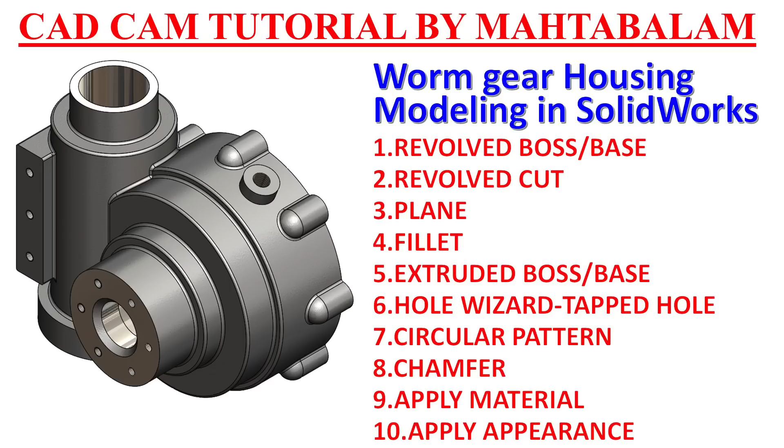In this tutorial, we are going to create a worm gear housing. Now look, all dimensions are in millimeters. Corner fillets are 2 mm unless otherwise specified. Material is also written at the bottom: cast steel. Density 7300 kg per cubic meter.

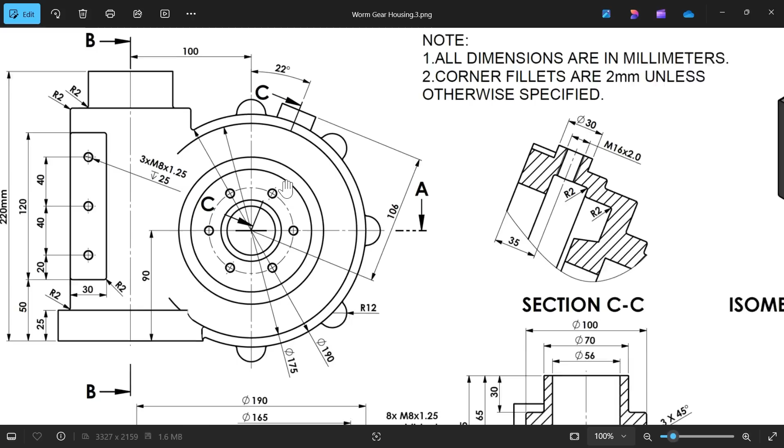Okay. Now, here we have one front view. This is considered the front view. Then there is a section AA. Section A passes through the center. This is section AA, and section BB for this cylinder body. This is going to be section BB, and there is section CC.

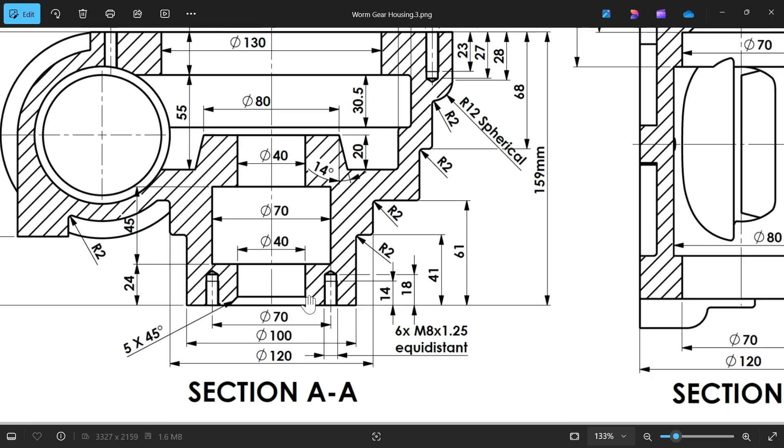We will see. So we are going to start with this outer body. You will see this circular body. First we will create the outer body, then we will cut. So for this outer body, just check section AA. Okay, let's make this body. Let's take the outer to outer dimension. Here you will see 100 millimeter and depth 41.

Similarly, the second one 120 diameter, depth 61. The third one and fourth one you will find here. Outer 190, 175, and depth 68, and total 159. Okay, that's it. Let's make this one first.

Now I'm going to choose top plane, sketch. Now activate the line tool. Okay, I want to tell one more thing. For reference, I am going to keep this cylindrical body center point at 60 millimeters. Remember how we are going to do this? Something like this.

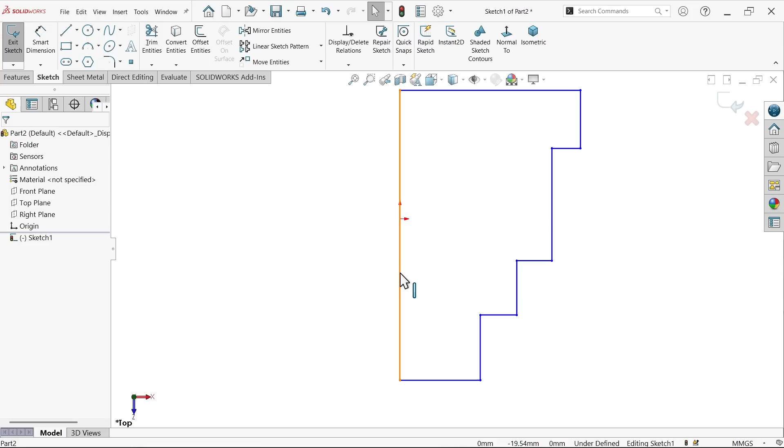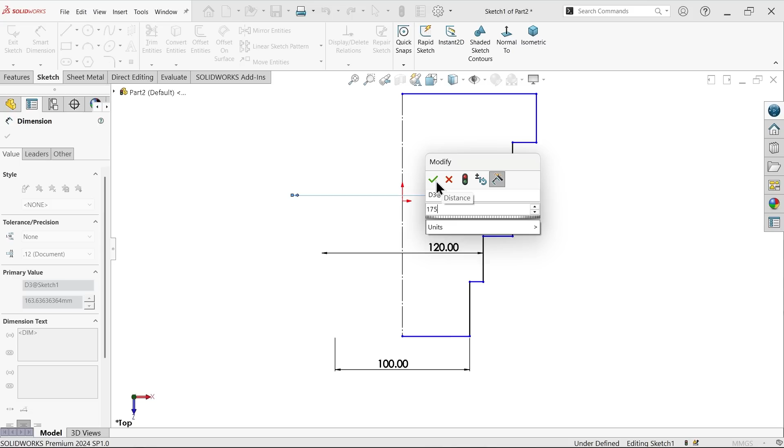Okay, select this line, construction, smart dimension. Now select this line and select the center point and move the cursor outside. It will show you the diameter. 100 millimeter. The second one 120. Third one 175. And the last one, outer body, 190. Okay.

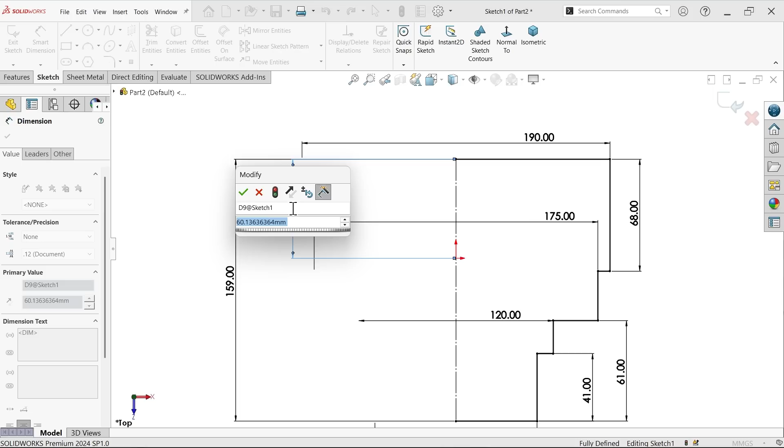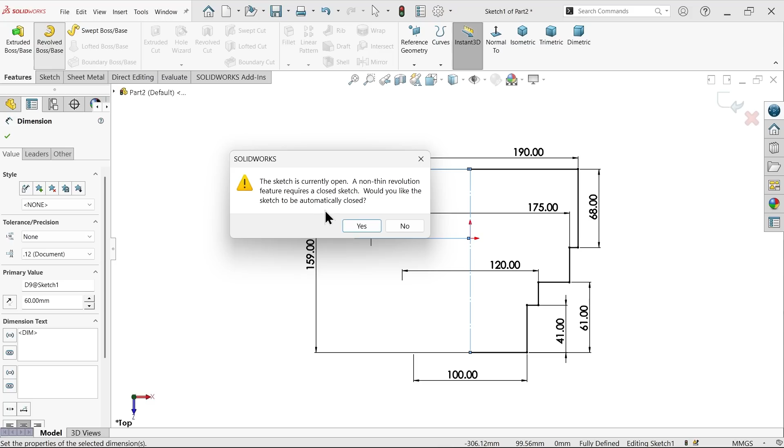Simply go to Features and activate the Revolved Boss/Base feature. Due to this construction line, the system says this profile is open. Would you like the sketch to be automatically closed? Say yes. Now, by default, the system took this center line as the axis of revolution. Now the body is going to revolve around this line. Here angle 360 degrees, end condition blind.

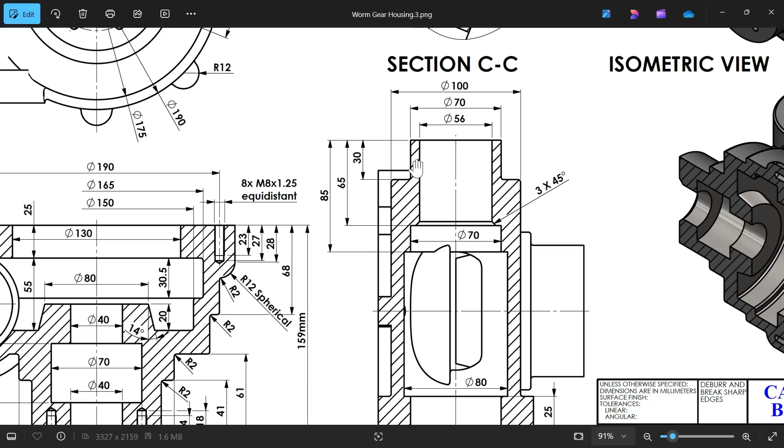Now let's make this cylindrical body. You will see this cylindrical body. What is the diameter for this? Section BB. This is section BB. Now from center, see the diameter 120 outer. Okay. Then this diameter 100. And there is one step, 30 millimeter, 56. Not 56, 70 millimeter. Okay.

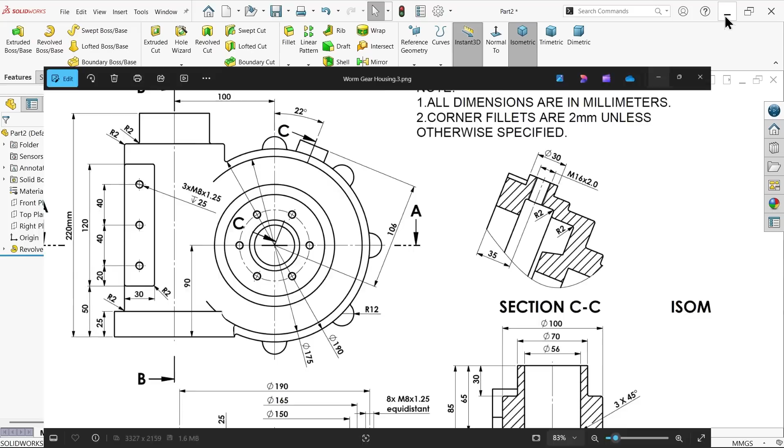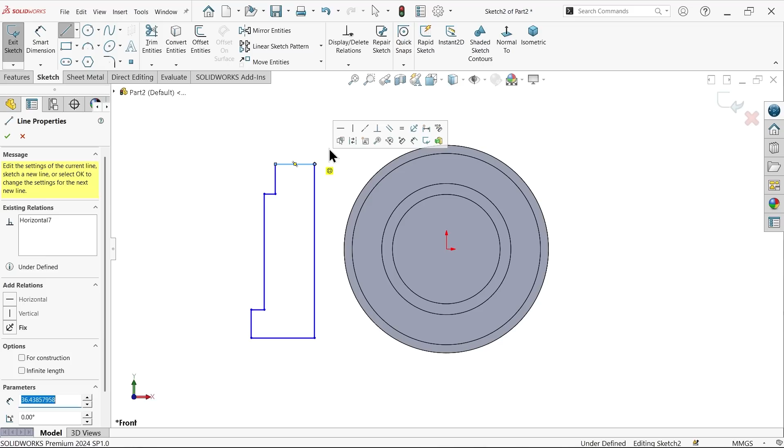Okay. Now select this line as a center line, smart dimension. Now first dimension, distance, 100 millimeter. Bottom distance, vertical length, 90 millimeter. Now this length, 25. And this is going to be 30. And the total length is 220.

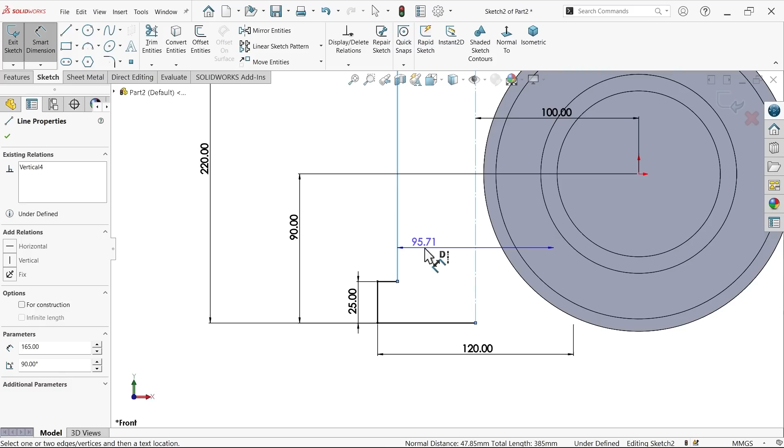Okay, now this diameter. Select the center point and move the cursor outside, it will show you the diameter. 120. 100. And the last one is 70. See, it's a fully defined sketch. Simply go to Features and activate the Revolved Boss/Base feature. Due to this construction line, the profile is open. So the system asks, would you like to close?

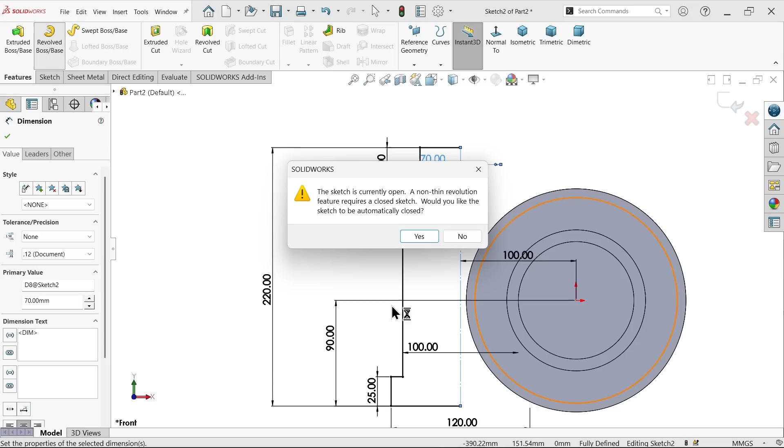Say yes. By default, the system took this center line as the axis of revolution. See here. And I want to make a complete circular body. So by default, the system took 360 degrees. If you make 180, it's going to make half. But we need the complete 360, and make sure Merge result is checked. So this is going to be one body. Here we go. Now it's time to cut.

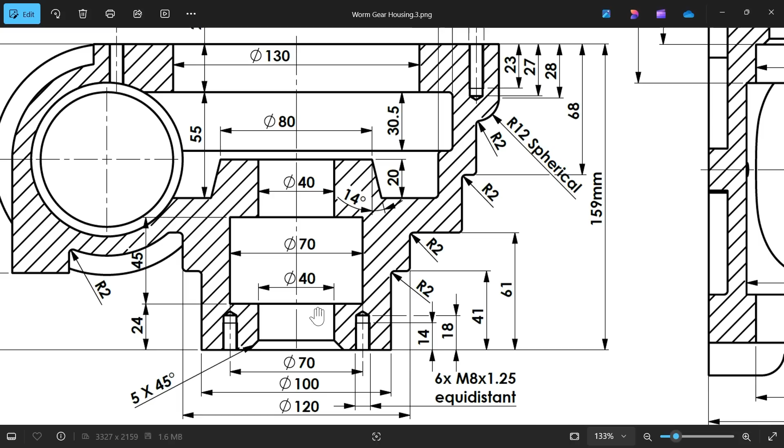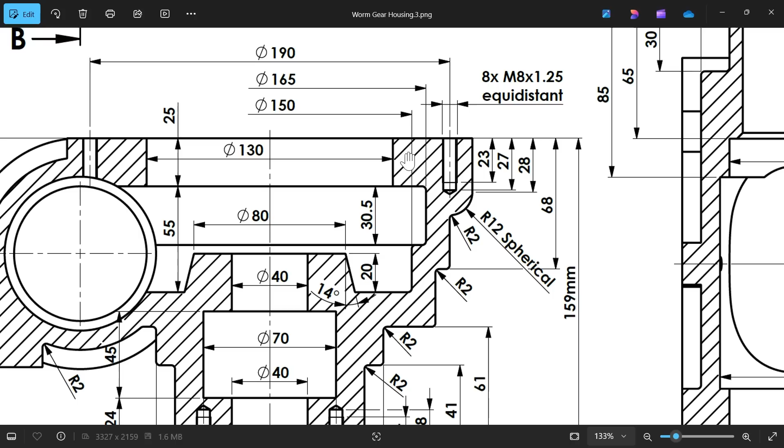You will see in the section view there are cutouts. Now for the cutout you have to go down from the bottom, front plane. Let's say 40 this diameter, 70 height, 24, 45 this height, then again 40. Okay, then here comes the inner diameter, this one 130, this one 165, and the other one 150. Fine.

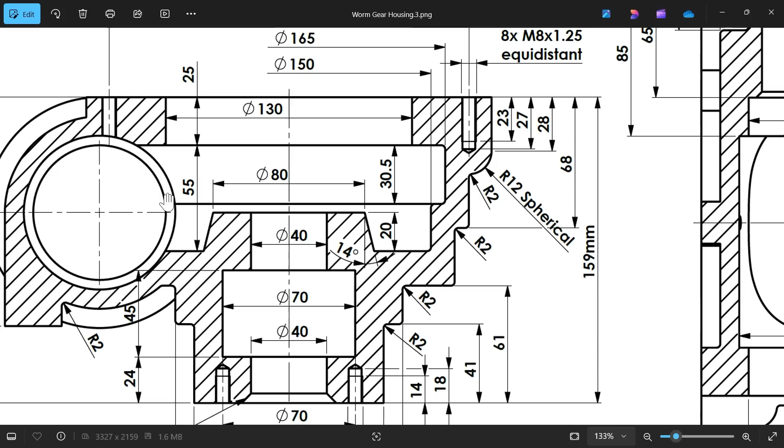Depth 20, 55, and here we have critical things, 20, 14 degrees. Okay, we will see how we can manage this one. 68, no, not this, for this one, 55, 25, 30.5 here, one given. Angle, remember, 20 from here to here. Okay, let's do it.

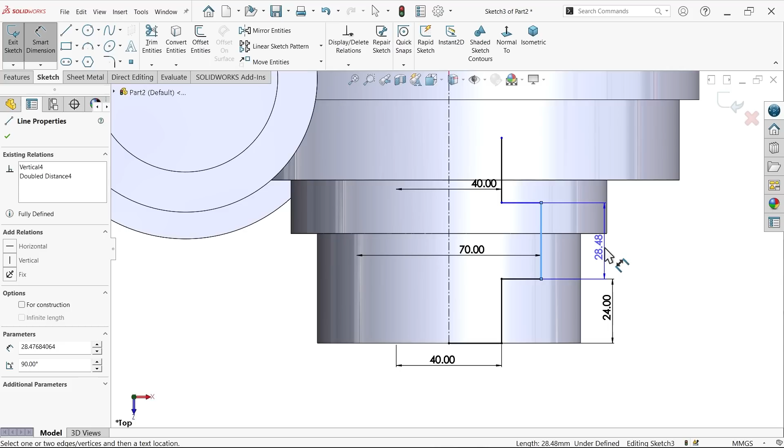Now for the plane, I am going to choose top plane. Sketch, draw one center line. Center line from midpoint to midpoint. Line, okay. Exit. Okay, let's define this first. 40, 70, again 40, and depth 24, 45. Okay, let's leave this one.

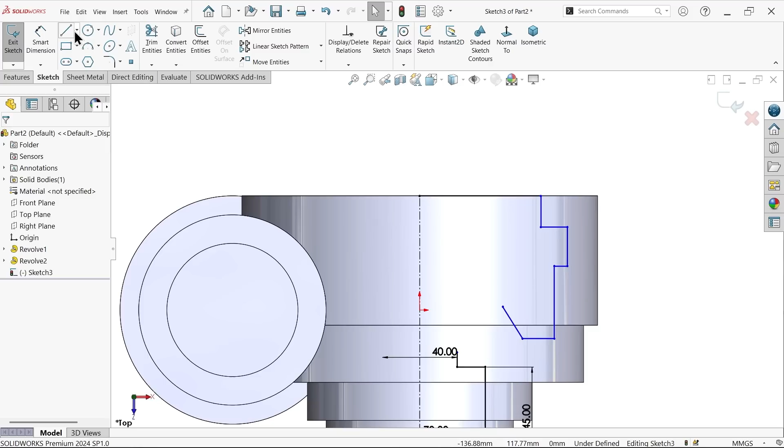Again activate line. Start from here, create a closed profile. Now come down, and we need to create something like this. Smart dimension. Now first this diameter, 130. The outer one, this is going to be 165, and there is the inner one. This is going to be 150 millimeter. Okay. Now this is also 80 millimeter. Okay.

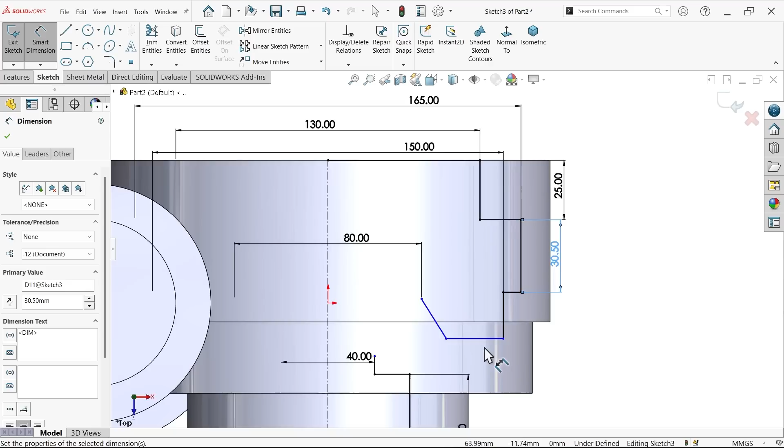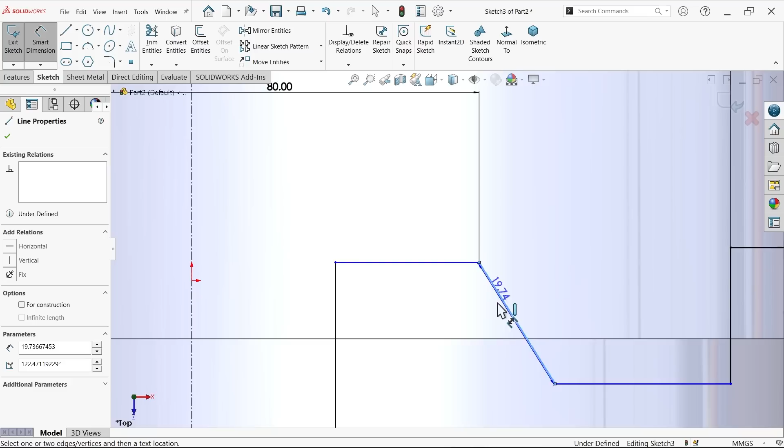Again, let's define 25 millimeter, 30.5 millimeter. Okay, let's move this one, and we need to connect with this. So select line, select this line, horizontal, smart dimension. Now first we need to define the angle. Select the line, select this vertex, and it will show you this. So select the bottom one, 14. Okay, this is important. Now this distance from here to here, 55.

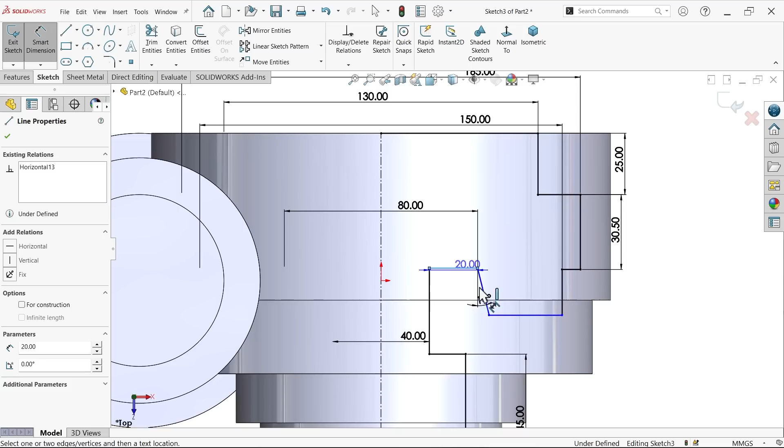Delete 55 given for this. Okay, let me correct. Distance between these two, 20. Okay, distance between these two, 55. Okay, now it's solved. Whatever we need to cut, now go to feature, activate revolve cut feature.

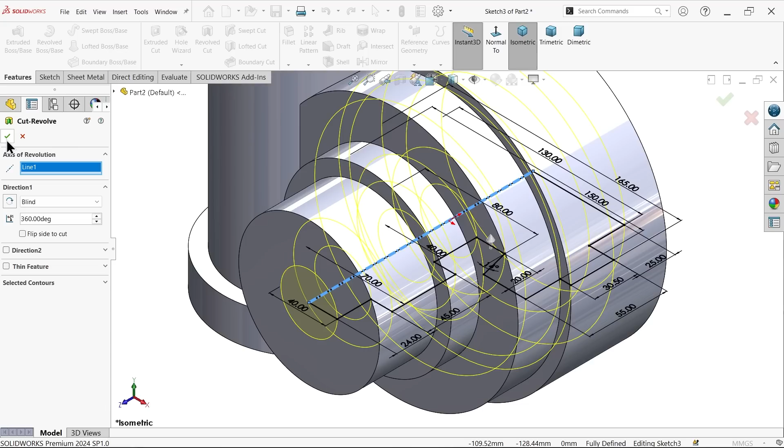Now look, by default the system took this center line as the axis of revolution. I want to cut a complete 360 degrees. So here by default 360, keep end condition blind, direction whatever you can keep, say okay. Section view, and you will see the preview. See? Okay. Now there is a chamfer, 5 into 45 degree. Okay.

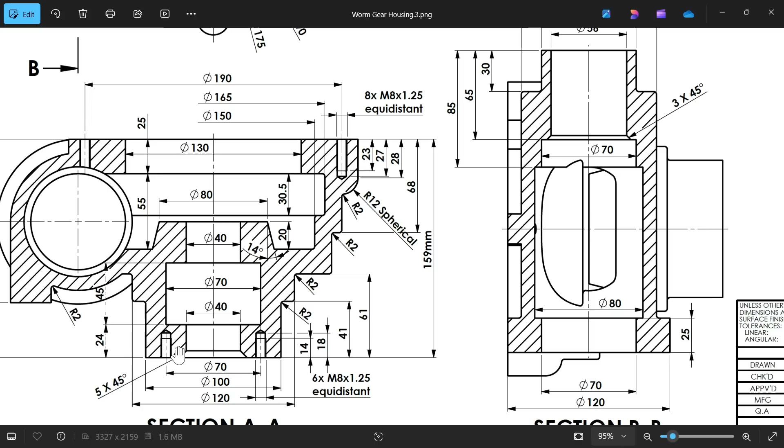Then we need to create one plane at 50 millimeter, and we need to make this circular body. Look, you will see here, this is going to attach diagonally from here to this body. See, 50 millimeter. You will observe here. Now activate plane. Select this one. Here make 50 millimeter reverse. Say okay. Now select the plane.

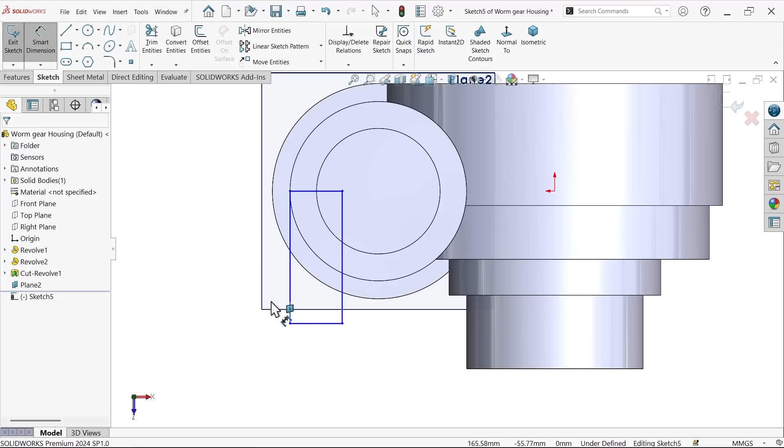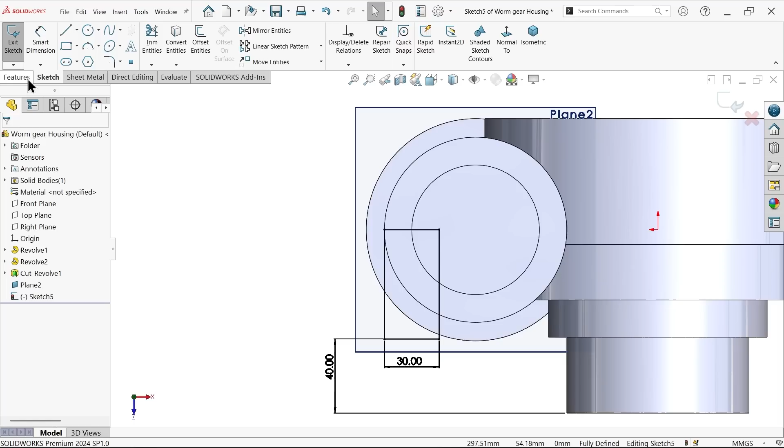Okay. Now corner rectangle, and see, this is going to start with this circle. Smart dimension. Now distance from here to bottom edge is shown 50 millimeter, 40 millimeter, and width 30 millimeter. It is still not fully defined. So okay, select this one, coincident. Okay. Extruded boss base, 120 millimeter reverse. Say okay.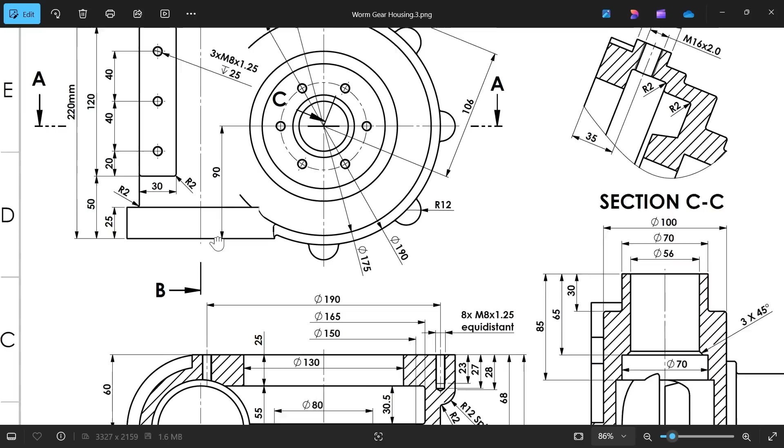Hide. You will observe the total length 120 millimeter and 50 millimeter from this face, and from here the distance 40 millimeter. Okay. Now you will see this circular body. There are total 8 number, 1, 2, 3, 4, 5, and 3 are invisible here. So we need to make this R12 and you will see the length of this is 28 millimeter.

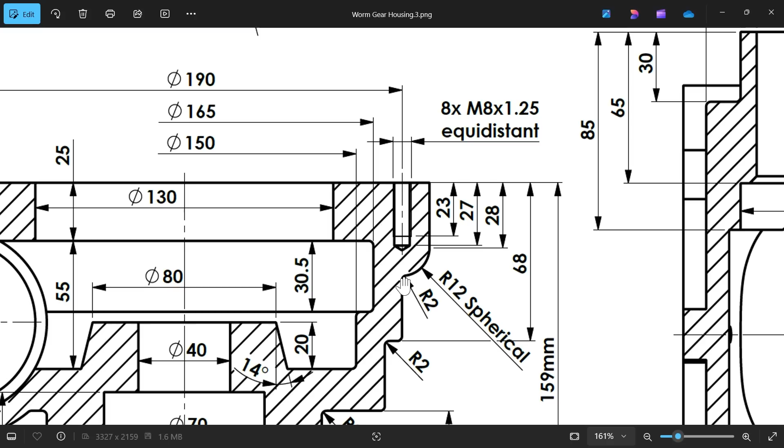Then there is a hole, tapped hole M8 1.25, 8 number equidistant, thread 23, depth of hole 27, and the diameter 190 pitch for this hole. Okay, and the corner radius you will see here 2 millimeter. Now there is one spherical R12.

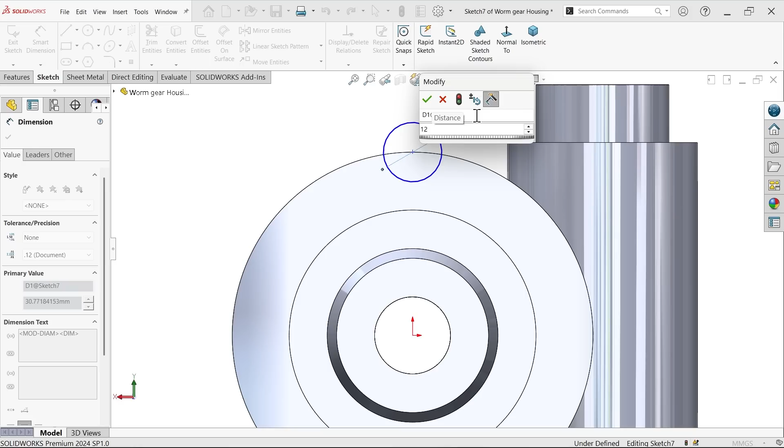Select this one, select this face, sketch, circle. Now let me draw a circle here. Smart dimension, 12 radius. Okay. Now distance from here to here, this is going to be 190 divided by 2 is 95. Okay. Define distance. Now keep end condition blind and length 28 millimeter but reverse direction. Say okay.

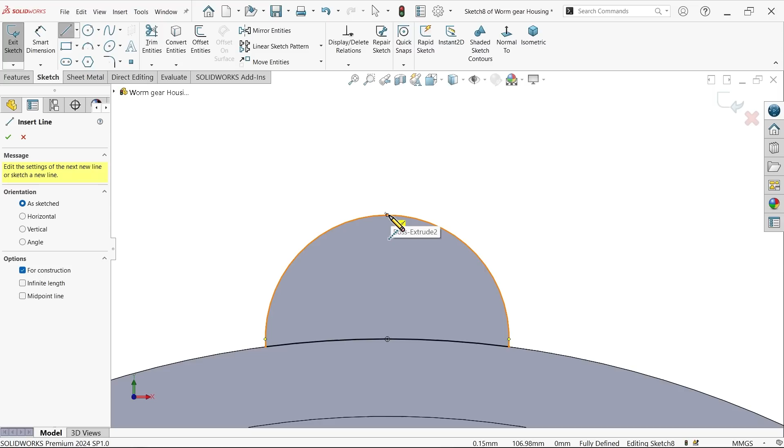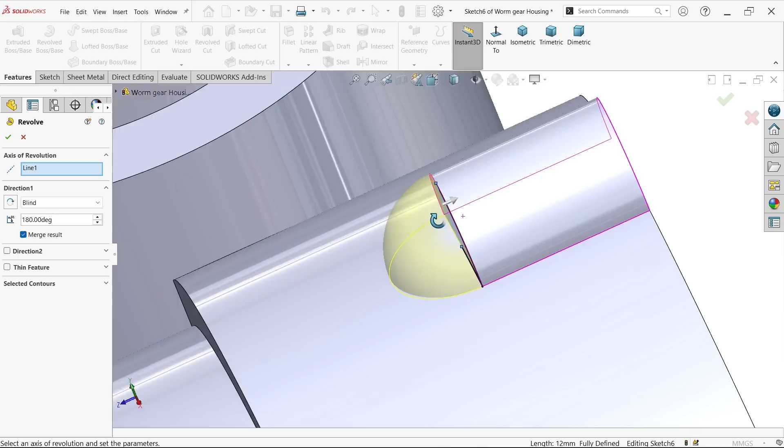Now here we need to create one spherical body, so I am going to select this face, sketch, convert entity, draw one line, trim entity, power trim, trim half portion. Okay. Revolve boss base. Yes. Now here I want only 180 degree, not 360 degree. Center line, by default the system took this center line. Say okay. And here we go.

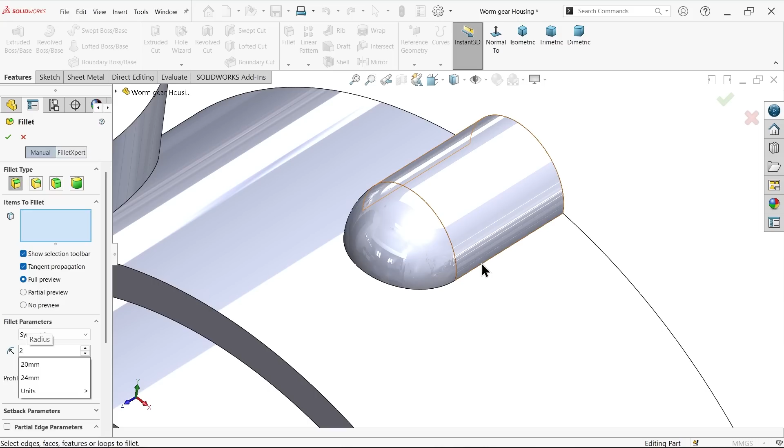Fillet. Here keep fillet type constant, symmetric, radius 2 millimeter, and select this one. Say okay. Now here we need to define hole wizard, tapped hole, ANSI metric bottoming tapped hole, not through all, M8. Now depth of hole 27 up to shoulder, thread 23 millimeter.

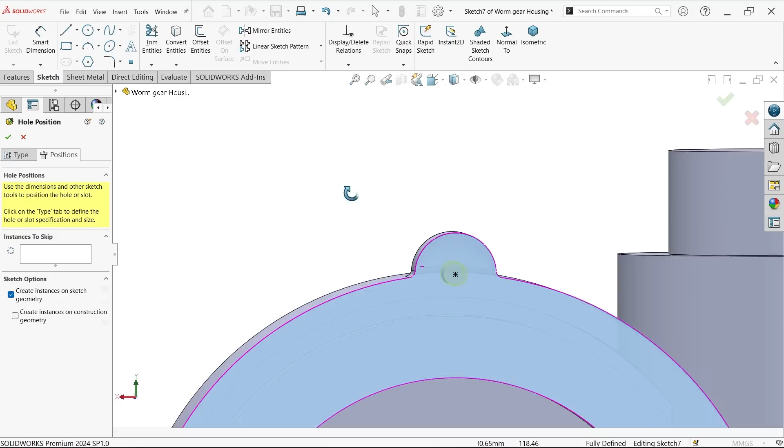Position. Now select this face. Now keep the cursor on the edge and it will show you the midpoint. See, there is a midpoint. Just place here. Look, it seems a fully defined sketch. Say okay. Go to options, document property, detailing, shaded cosmetic thread. Say okay and look.

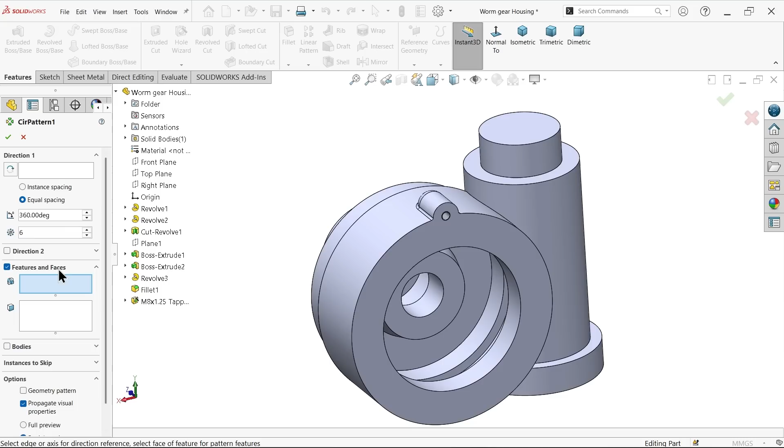Now we need to make 6 number of patterns. So circular pattern. Now feature. First you have to define one circular direction. Either select an axis or any circular edge. So I am going to select this face. This is circular at center. Equal spacing 360 degree and 6 number of instances. Feature. Now define features from here. This hole, fillet, revolve body and extrude body. These 4 we need. Say okay. And here we go.

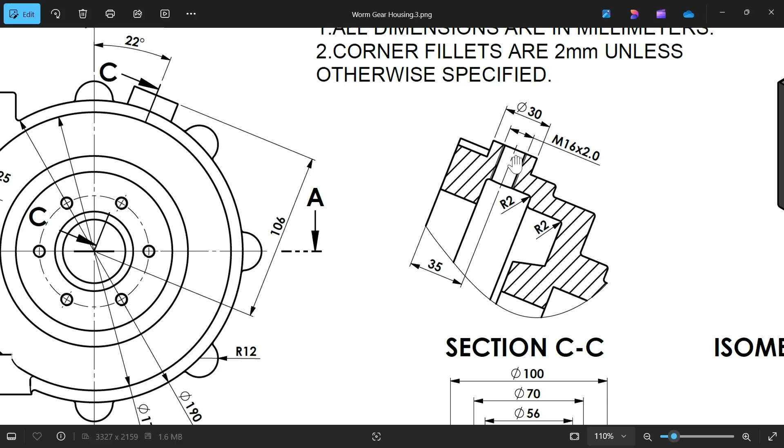Now let's make this one, 22 degree, 106 from center, and you will see this section view, 30 millimeter this diameter, and from one edge after this section view, see, from this outer edge 35 millimeter. Move towards body. Okay, then there is an M16 into 2 hole. Okay, this hole we need to make up to inside. That's fine.

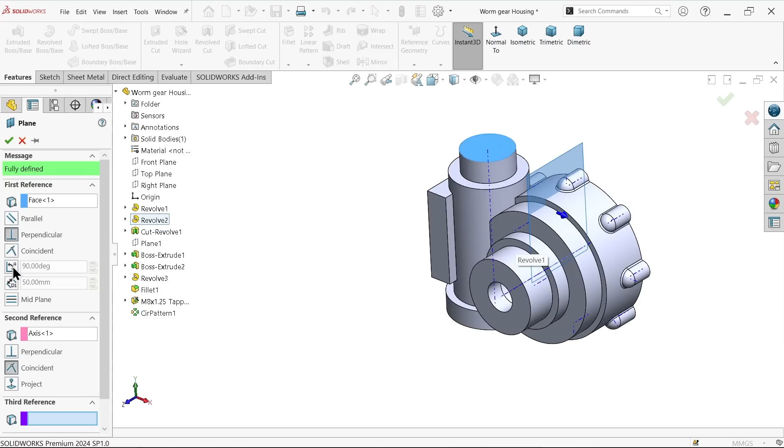First we need to create a plane. Let me activate temporary axis. Reference plane. I am going to select this one. And I am going to select this center. Now look. Now here see angle 22 degree. Now just check the view. Okay, this is at perfect position. Okay, now this is the first face.

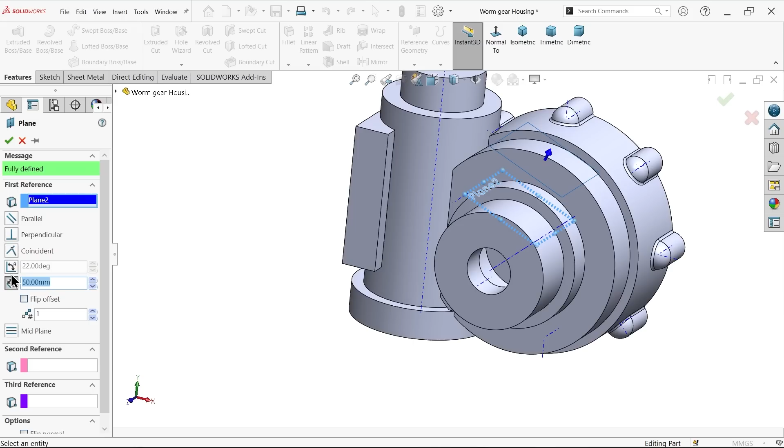Again select plane. Now for reference I am going to select plane 2 and here distance 106. You will see the preview. One plane is going to be created here. Say OK. First let me hide temporary axis and let me hide plane 2 also. Now this is plane 3. Sketch, circle. Let's make this diameter 30 millimeter. Okay. Now let's move it here somewhere.

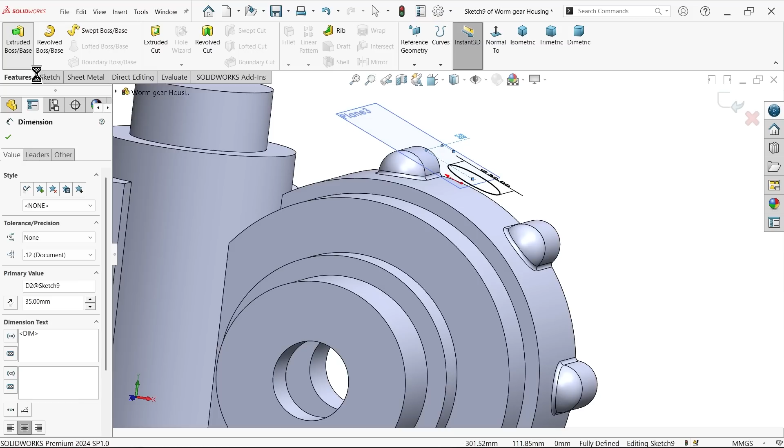Select origin point and this one, make horizontal, smart dimension. Now outside distance is given 35 in section view. Isometric view. See, extruded boss base. Look, this is moving the wrong direction, so change direction, and here in direction 1 I am going to choose up to next. Okay, up to next means this outer face is going to be next. Say OK. Hide.

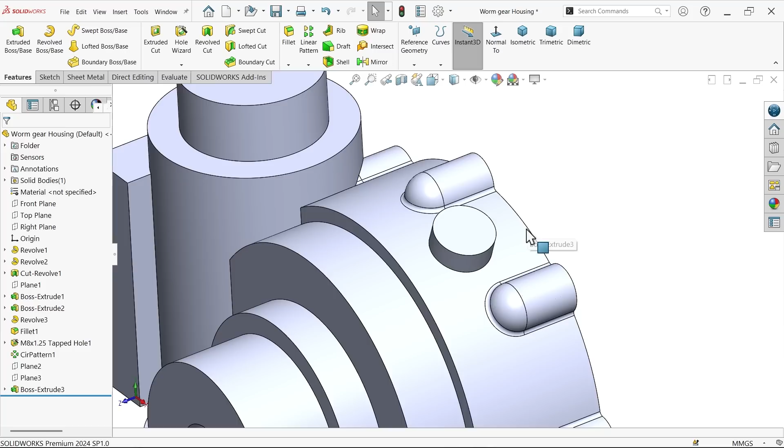Now there is already hole wizard. Now here choose tapped hole, ANSI metric bottoming tapped hole. Here I am going to select M16 into 2.

And this hole is going to be up to next, so no need to define. Select this face, now select this face and place at center. Look, it seems a fully defined sketch. Look, from inside, from outside.

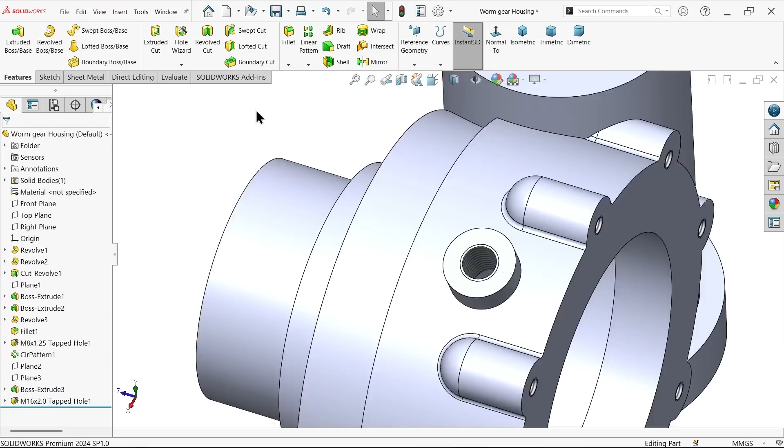Now we forgot to add a chamfer here. Select this edge, chamfer. Chamfer type, angle distance. Here we need to select the edge. Tangent propagation, full preview. And here let's say 5 into 45 degree. That's it. And we save it as worm gear housing.

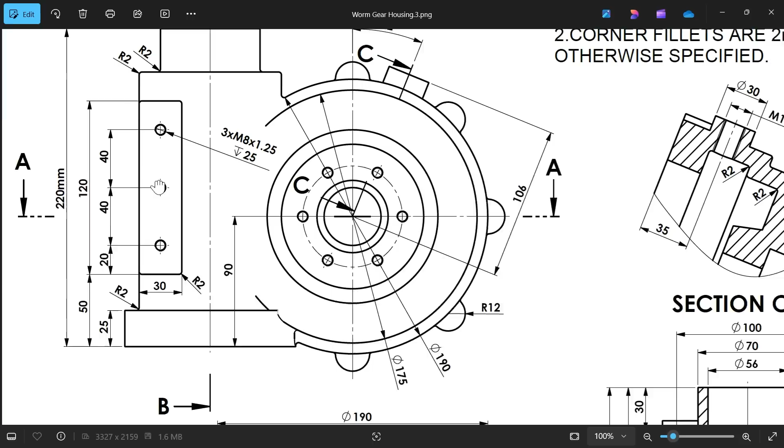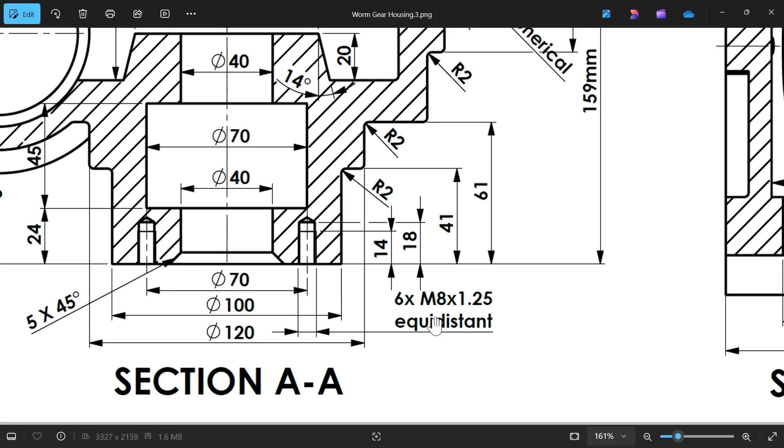Now it's time to make these holes. These holes lie at center 20, 40, 40 and M8 1.25, depth 25. There are 3 holes. Okay. And there are some more holes. Look at this face. There are 6 holes. Come to the bottom. M8 1.25, 6 holes equidistant. Now diameter 70. Now depth of this hole 18 and thread of this hole 14.

So, hole wizard. I am going to choose hole type straight tap, standard metric tapped bottoming hole. Now from here M8 into 1.25 pitch. Now depth blind, 25, and thread depth also 25. Thread depth is not given, which means we will consider 25.

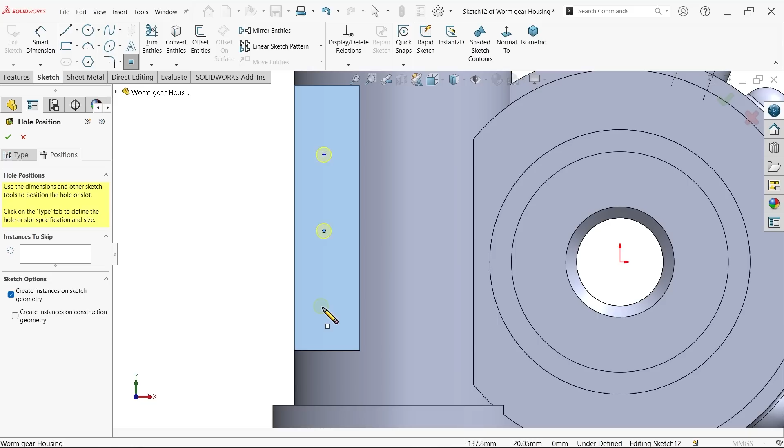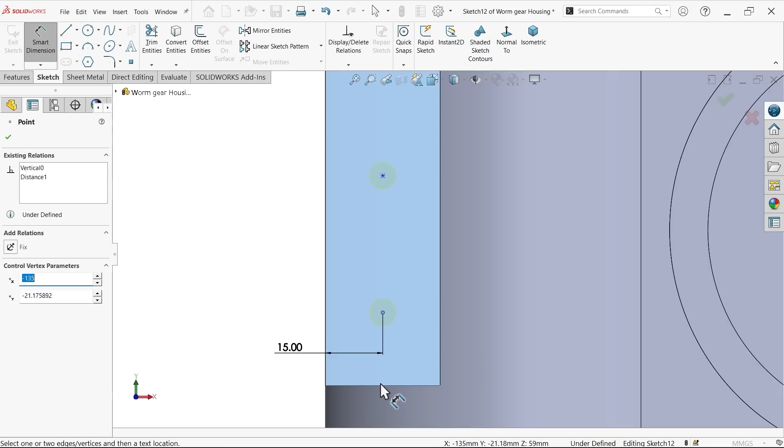Position. Now select this face. Now place at 3 locations. Right click, choose select and out. Let's create constraints first. Select all 3, vertical. Smart dimension. 15. 20. 40. And the last one also 40. Now it seems a fully defined sketch. Say OK.

And here we go. Now the same hole we need to create here. Hole wizard, tapped, straight tap, metric standard tapped bottoming hole M8 into 1.25. Okay, depth 18, thread depth 14. Now here in options select thread with callout, cosmetic thread. Position. Now select this face and place somewhere here.

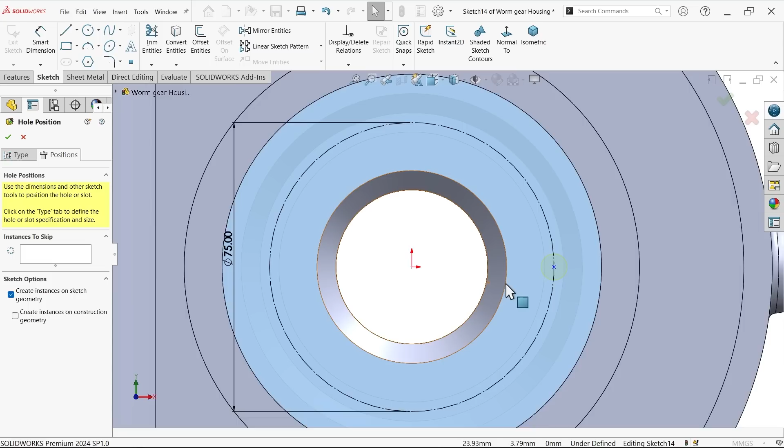Exit. Select circle. Draw one circle and make sure of the center. Select for construction. Smart dimension 75. Okay, still not fully defined. Select this point and the origin point and make them horizontal. Say okay. Okay. This is going to be M6. Okay, not M6, this is M8, not M6.

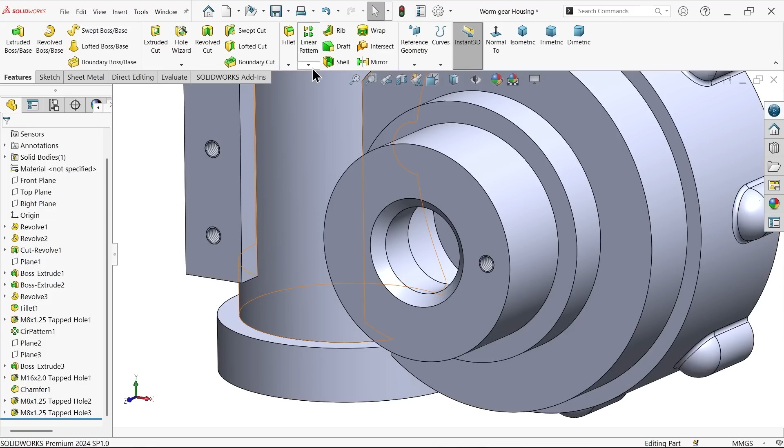Circular pattern. Now first I am going to choose for direction any circular edge or axis. Circular edge is perfect. How many holes? 6 holes. 360 degree, and let's select the hole. You will see the preview. See?

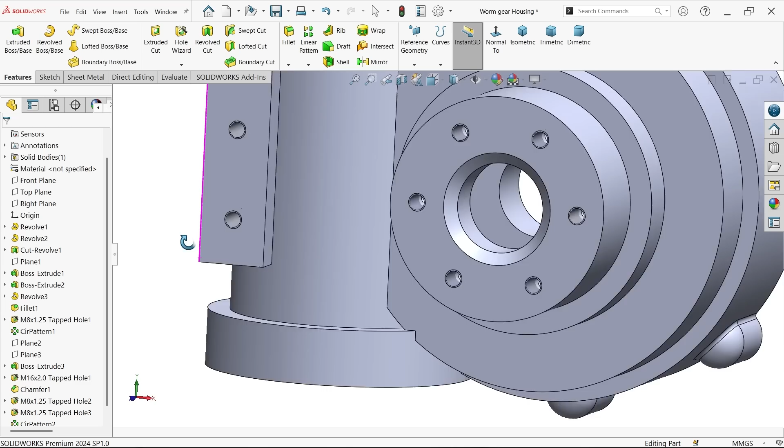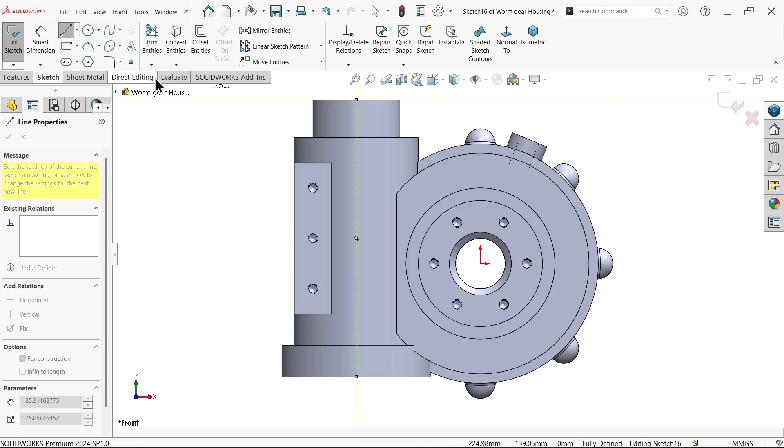So for this, front plane, sketch. First, let me draw a center line. Draw a center line from midpoint. Find midpoint to midpoint. Now again draw a line. Close profile. Okay, let's start from the top.

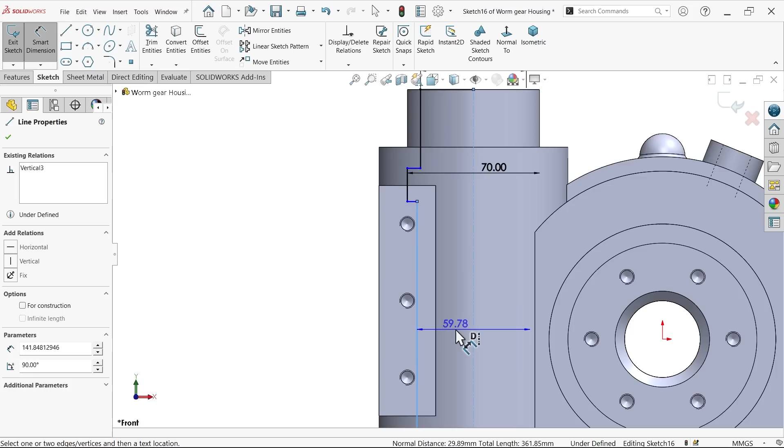Diameter 56. This one 70 millimeter. This is going to be 80 millimeter. And the bottom one also 70 millimeter. Okay. This length 25. 85. 65.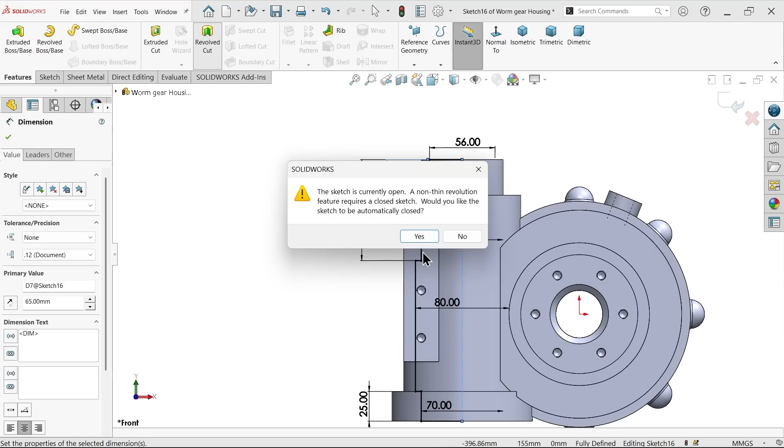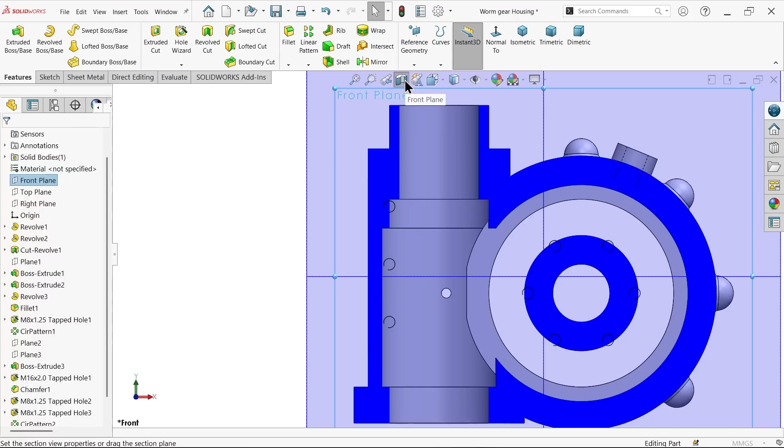Revolve cut. Due to this construction line the profile is open, so the system asks, would you like the sketch to be automatically closed? Say yes. Now by default the system took this center line as the axis of revolution. This is going to cut 360 degree along this axis. By default 360 degree, say okay. Now it's front plane section view. Okay. And see the preview.

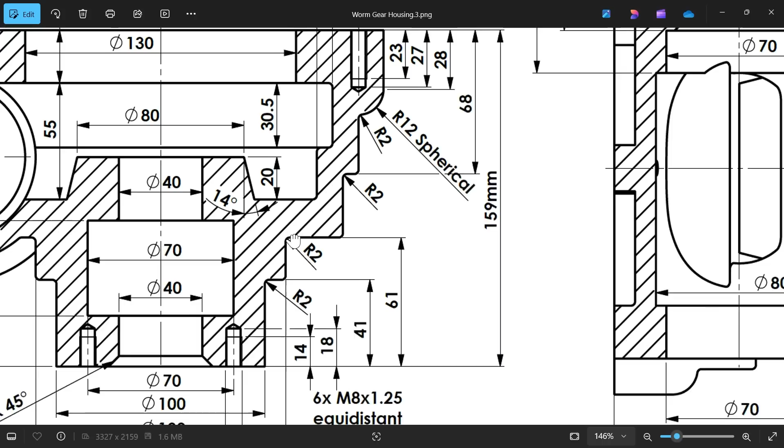Now you will see outside 2 millimeter, 2 millimeter, 2 millimeter, and some are unspecified, but it's already written they're also 2 millimeter. Inside here you will see 2 millimeter, 2 millimeter, outside 2 millimeter. Inside only chamfer 3 into 45. And see, these are also 2 millimeter. 2 millimeter here also, and inside see 2 millimeter.

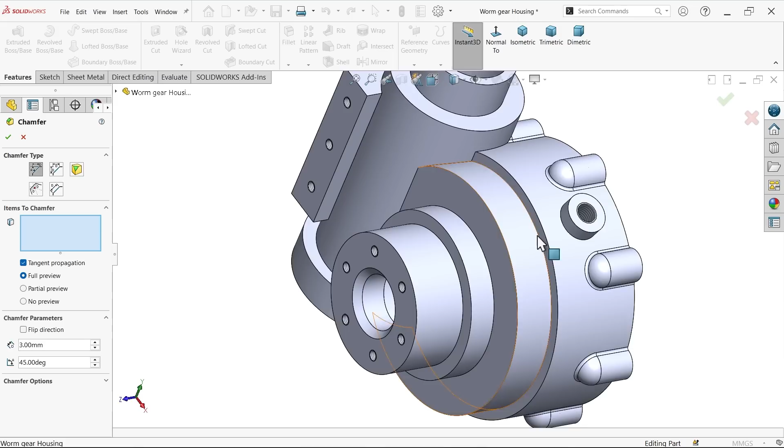Chamfer. Angle distance 3 into 45 degree. Okay. This is going to be applied here, the first one. Okay. Now let's see front plane section view. Okay.

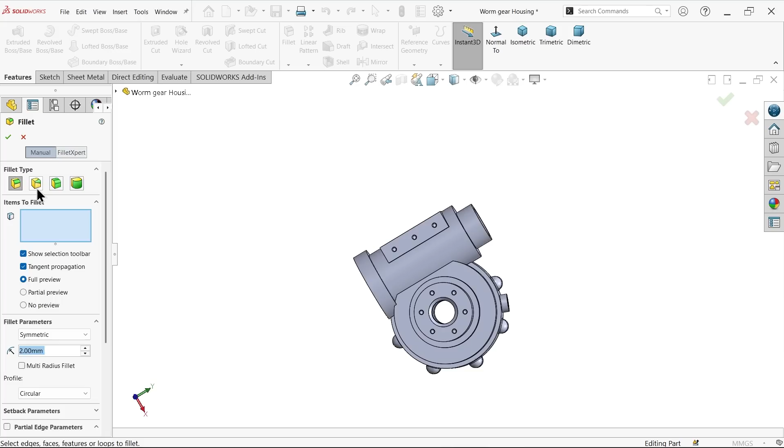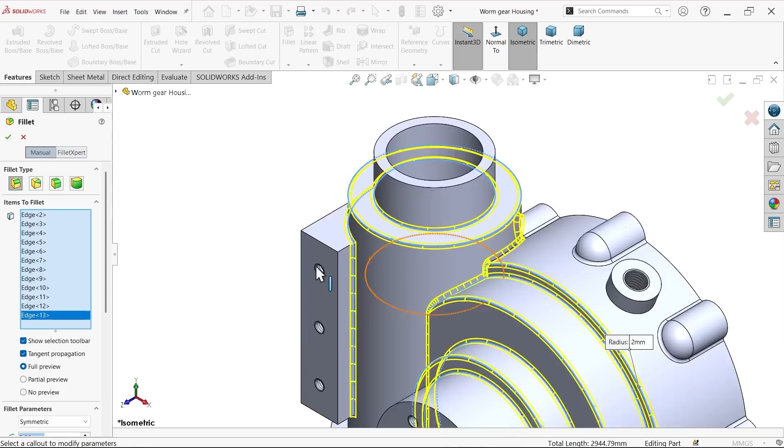Fillet, constant type, 2 millimeter symmetric. I am going to select this face, this face, this face. There is a problem taking faces, so check edges one by one. Okay. Okay, only this much, because if you go too far, it may create problems.

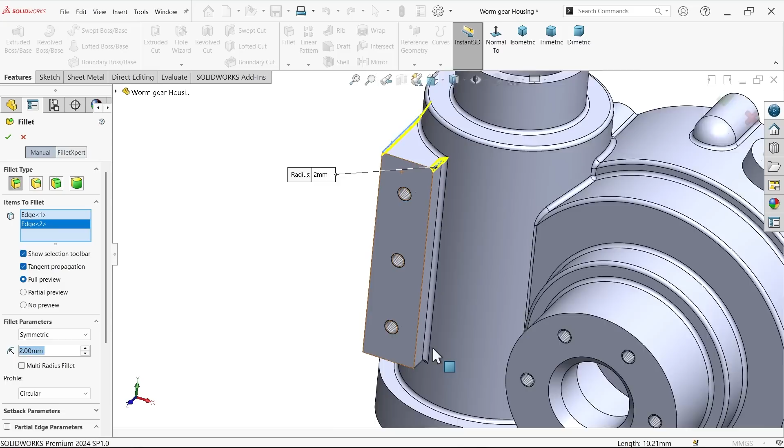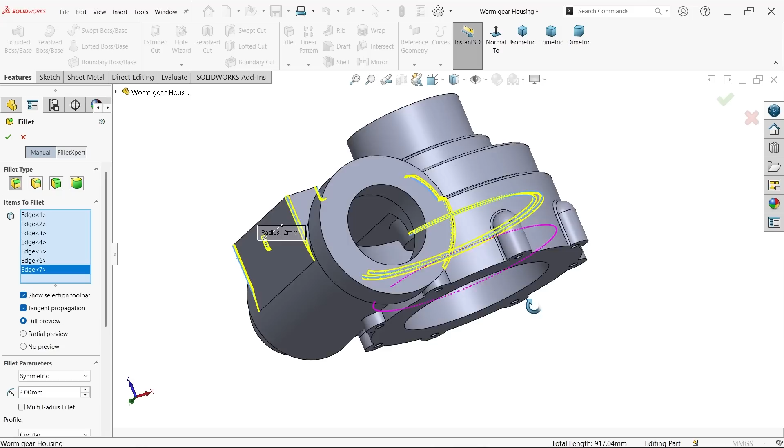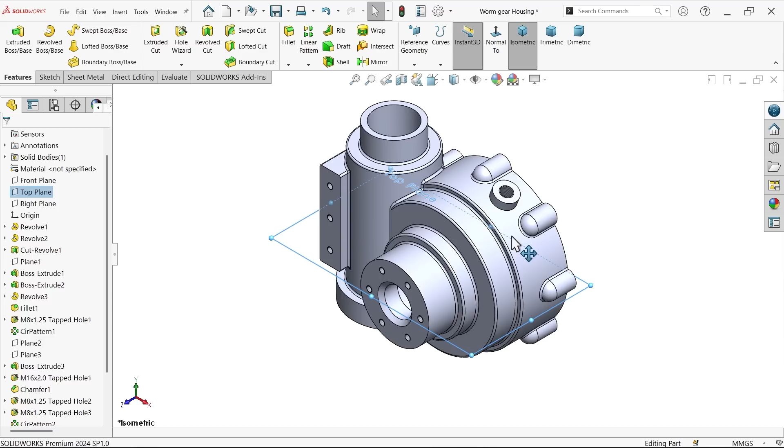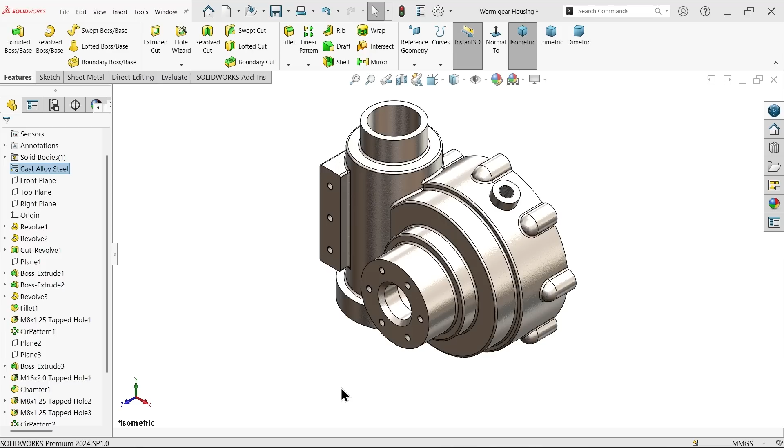Now edit material. Now cast alloy steel, see the density 7300 kg per cubic meter. Apply, close. But for the view, I'm going to change this. Edit appearance, metal. Now for view, cast iron, color change, edit appearance again. Now from here you can change this color. Okay, that looks perfect.

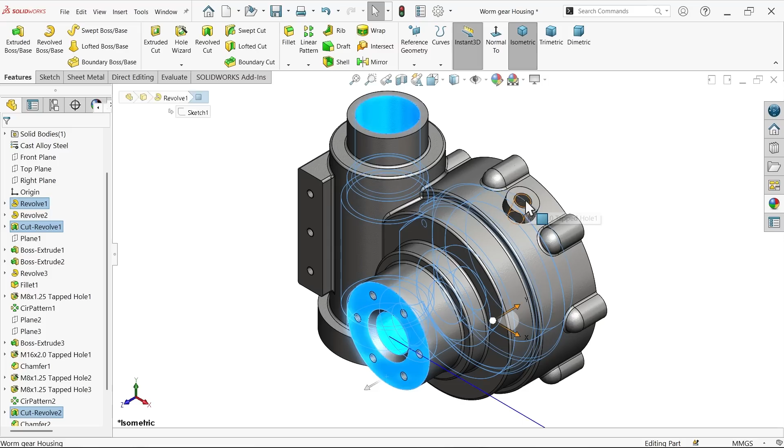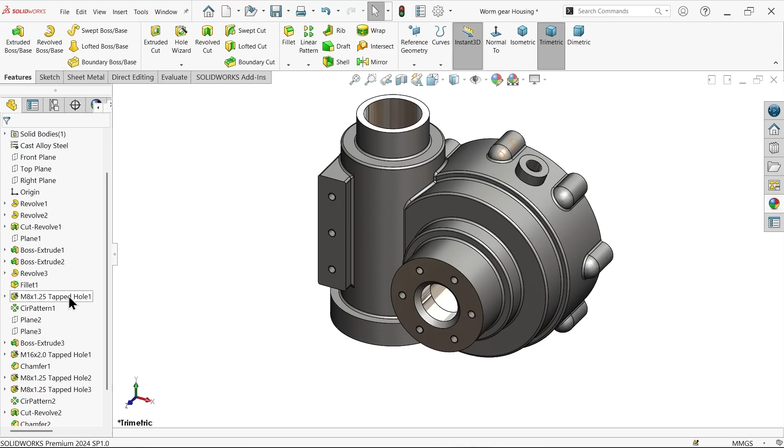Okay, now, all curve, select this face, and select this face. This is going to be machine faced, polished steel. Now all the holes also polished steel.